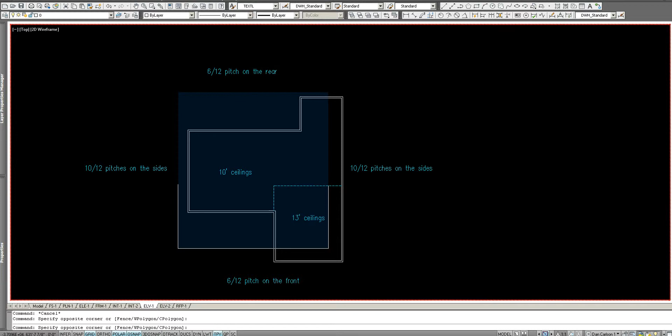Alright, so I am going to do a demonstration on how to draw a fairly simple roof, but with a couple of things that make it more complicated than just a standard roof. Let's say we've got a building shaped like these white lines, and the clients want 10-foot ceilings throughout, but a 13-foot ceiling in the front, with 10 and 12 pitches on the sides to make it look nicer from the street. But they want 6 and 12 pitches on the front and back, maybe to save some money on the roof. So we've got a couple complications: unbalanced hips and valleys, and different plate heights.

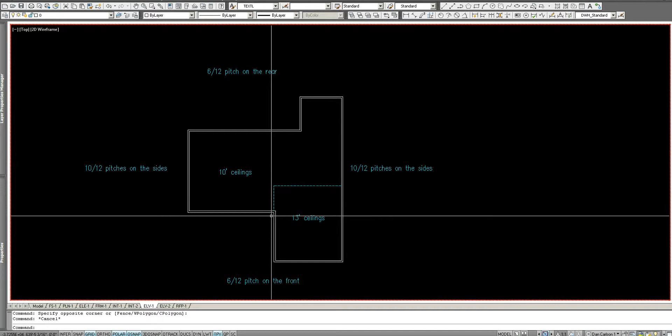So the first thing we have to do before we can start drawing any of the roof is determine how we want our overhangs to work. So what we have to do is, over on the side, draw a 10-foot plate with a 6 and 12 pitch, and then a 10-foot plate with a 10 and 12 pitch.

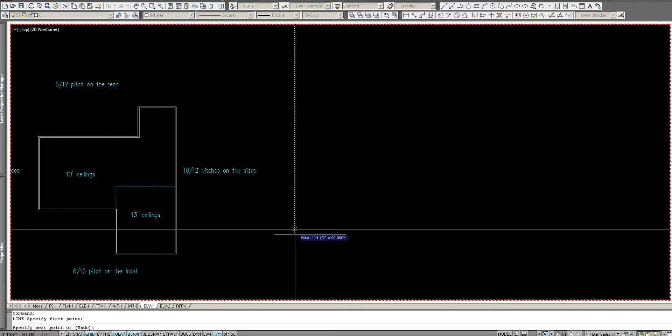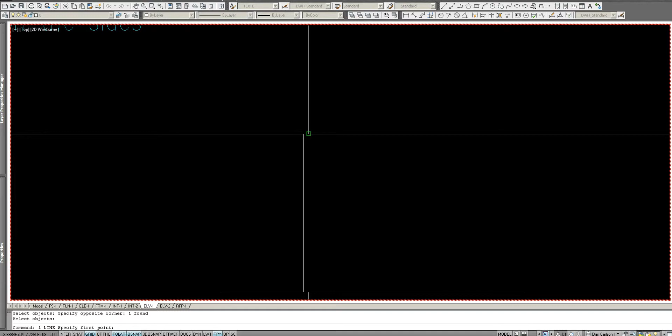The way you do this fairly quickly is come over here somewhere on the side and draw 121 inches, because they're actually 10-foot 1-inch plates, or 10-foot 1 and 1/8, but forget the 1/8. Over 4 inches and then back down. This represents the plate, the stud wall with the bottom plate and top plate. We'll go 12 inches, up 6, close it, and do an offset of 6 inches. That's the rafter and the 1/2-inch plywood. We'll worry about the overhang in just a minute.

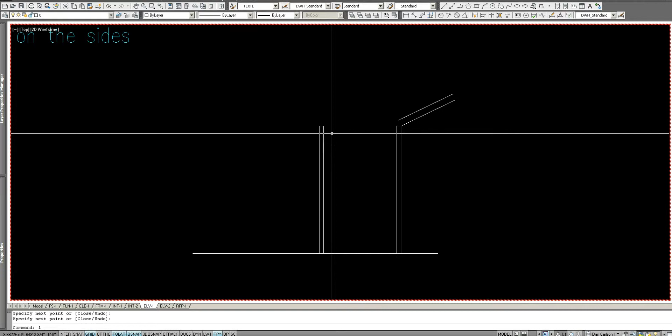That is the 6 and 12 pitch. Let's do the 10 and 12. 121 inches, 4 inches, back down. Again, we're going to do an offset just to make it easier to see in a minute. 12 inches, 10 inches, close. That's our pitch for the other side. Offset that by 6 inches.

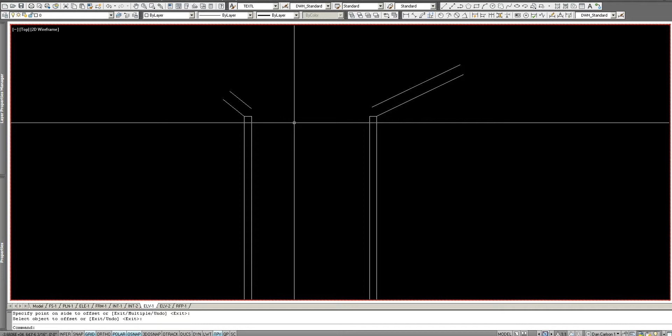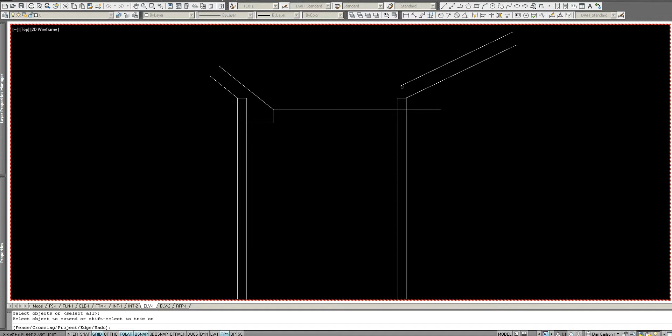Now we have to figure out our overhangs. What you'll notice is, because of the different slopes, the overhangs cannot be the same, or there'd be problems. So typically for the 10 and 12 pitch, we're going to want a smaller overhang. Let's start with 12 inches and see what that does. We'll go to this point. If you're doing a 6-inch fascia, just do 6 and then over. This is a very simplified version of an overhang, but for what we're doing, that's all that matters. We want the fascias to be at the same level. If we extend this over and draw the same 6-inch, we can see that this one was a 12-inch overhang, and this one ends up being a 20.5-inch overhang.

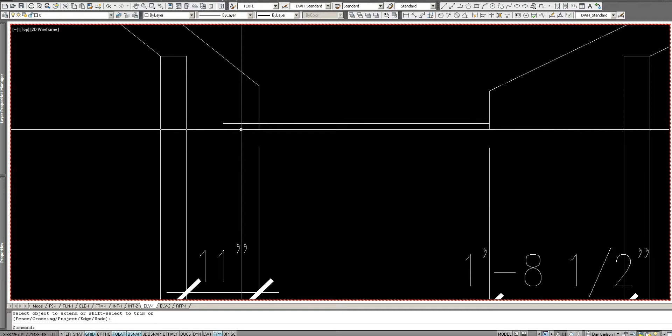That's okay, but you might say, what if we did an 11-inch overhang? How would that make the numbers any easier? Let's just see what an 11-inch overhang does. Same thing, we'll draw a line over. Before we even draw that box out, we can see that's a 19-inch. So maybe that's better, maybe 11 and 19.

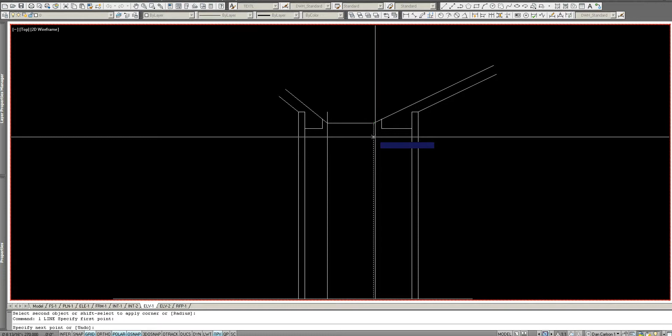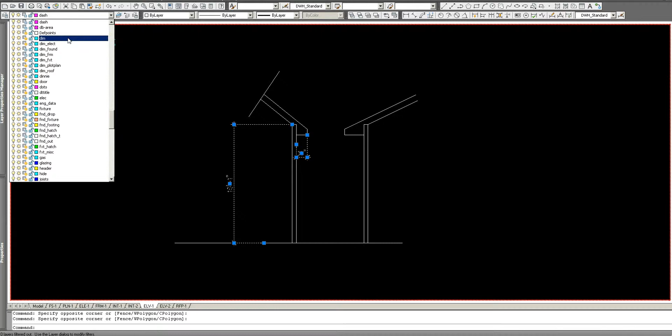So you could experiment with this. You could do all sorts of overhangs. You could have the 10-12 be a 14-inch overhang, which would mean the 6 and 12 would be a 2-foot overhang. So again, you have to know what these are ahead of time. Let's say we decided for this to be our solution. I'll sometimes make a little note like this so that I don't forget. Every house is different, and sometimes I just like to remind myself.

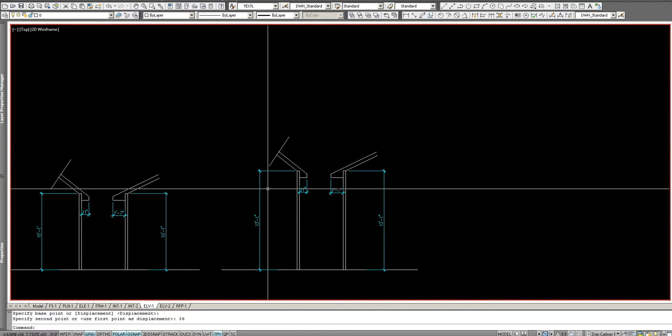So I've got over here on the side my 10-foot walls with the overhangs, and then I'm going to come right over here next to it and do my 13-foot walls, because I don't want to slope up to 13, I want an actual 13-foot plate. So I have these all drawn out, and we know what our overhangs are going to be. So now we know that where we have the 10 and 12, we're going to have an 11-inch overhang. We can come over here now, whatever layer you want it to be in.

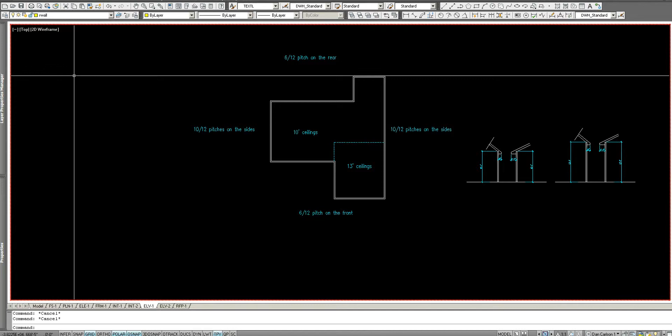Well, what I always do is I draw my roof plans with a different set of parameters. So I have an R wall for my rafter wall, or my roof wall, and I create a polyline that goes around the whole thing.

And then we can turn the wall layer off. Unless I turn off a whole bunch of other things. There we go, that's fine.

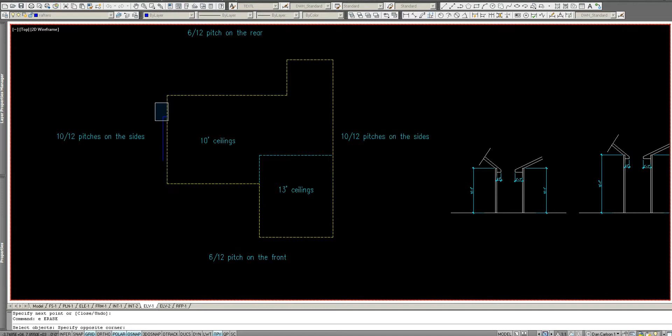Now for my rafters, I'm just going to come over here, and I know it's 11 inches. So there's my 11 inch on this side. I also know that even for my 13-foot ceilings, my 10 and 12 pitch side is going to be 11 inches. Again, this is 11 inches. Same on this side, and then we can copy this over, and that's 11 as well. Okay, so we have the sides done.

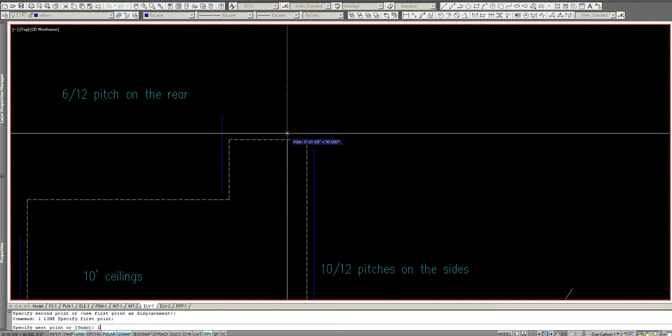For the front and back, which is the 6-12, we need to do 19 inches. 1 foot 7 is 19. And then we can copy this here. 19.

And copy this here. I'm going to first draw, and then we can go ahead and fillet all of the corners. Don't worry about where we have plates that go up and down and all that. For now, we're just going to do this to get it nice and clean.

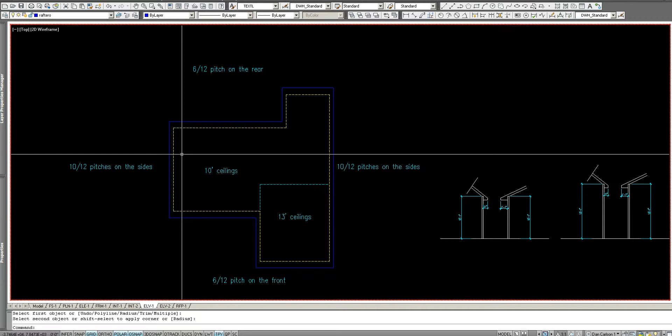We're going to draw this entire roof currently as a hip roof, because if you can draw a roof as a hip roof, it's really easy then to make any of them a gable. So we're going to do hips because those are the hardest.

So we need to create this hip and this hip and this valley and this hip and this hip, this valley, and so forth. So how do we create this? If the pitches were the same, you would just draw a 45-degree angle, and that would indicate that we have an even pitch on both sides.

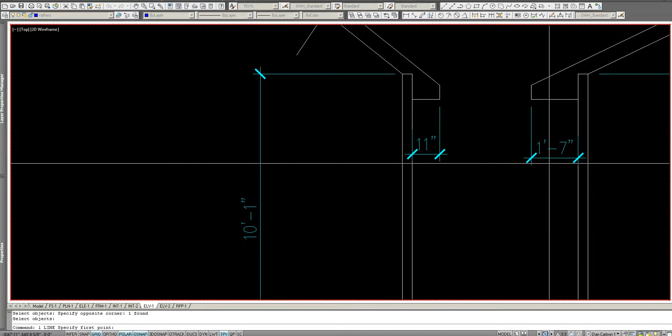Let's say it was an 8 and 12 and an 8 and 12, but we don't, so we have to create an angled line. The way we do that is we're going to draw one line that's 11 inches long and the other line that's 19 inches long. So which one do you make in each direction?

I always just remember that the lines go in the opposite direction of the roof slope. So we know that this roof here, I'll draw an arrow real quick. That is a 6. This over here is a 10.

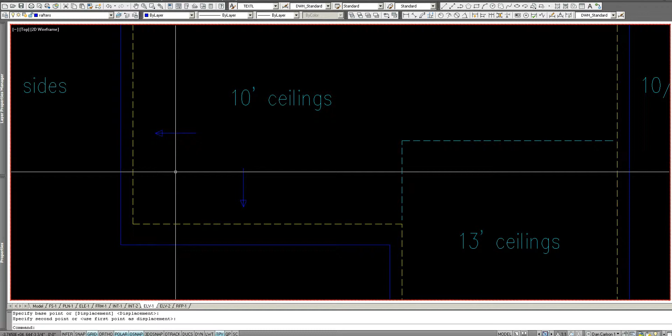So if I draw the opposite of that, instead of doing down a 6, I do a 10 here and a 6 here. And then do a close command. That creates the angle that is this hip.

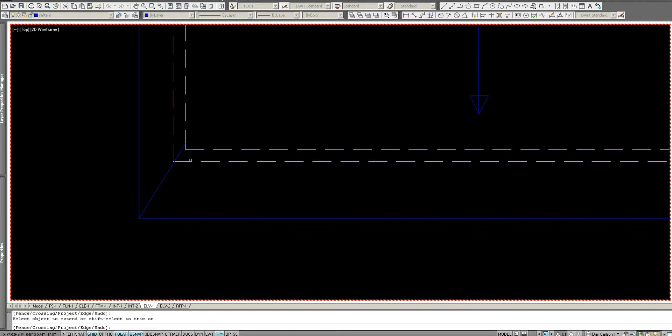When I put it there in the corner and extend it, it's going to come very, very close. You might say, well, why doesn't it hit exactly? Well, because you have to offset this to the inside—actually, that's not true, sorry. The reason it's not exact is because I don't think these are exact.

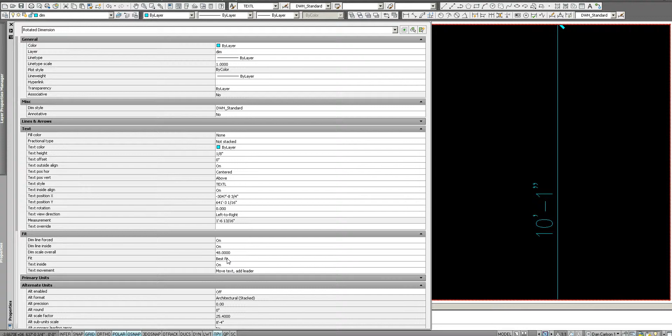If we were to take our dimensions and carry the tolerances out, where are my tolerances? Well, oh, there it is, fit. No, that's not it either. Primary units, there it is, sorry.

Instead of doing a round off at 1/2 inch, if we were to do something like 1/8 inch, and then the precision is at 1/16, you would see that we're actually at 18 3/4.

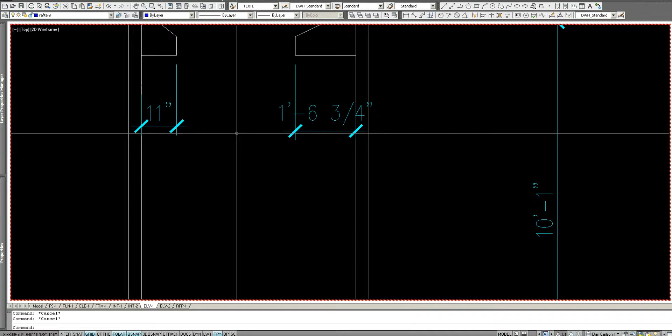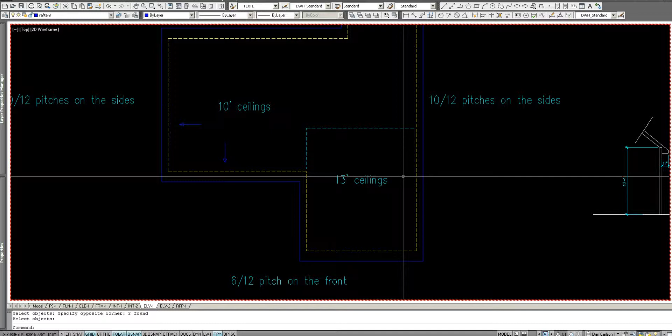So if I was actually to do this as an 11 and 18.75—did that wrong, sorry. If these overhangs were instead of being at 19 inches, it was at 18 3/4 inches. Now watch. 18.75. That's where our difference was.

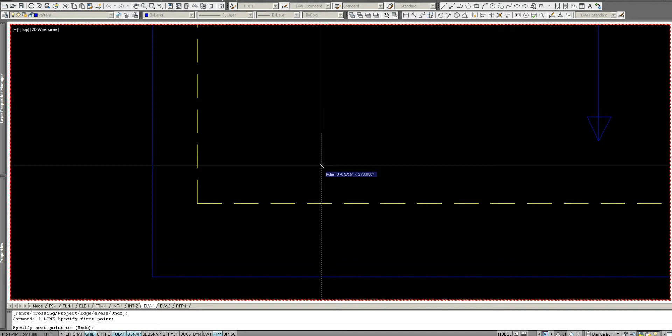Now if I draw my 10 down and 6 over and close it, this should be almost exact. And there you can see it's very, very close. So that's the reason why.

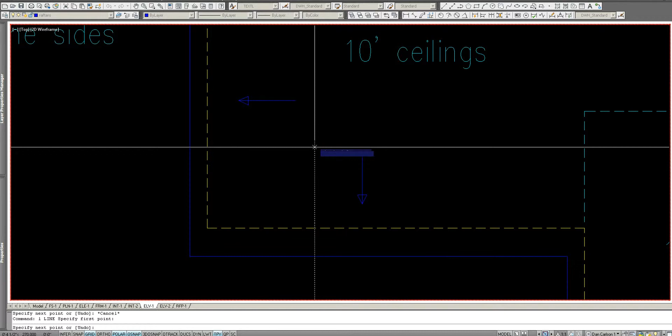I'm just going to undo all that, but it should be almost exactly to that point. So sometimes you can cheat if you know and just go to that point, but again, we'll just stick with 10 and 6 and close, and that creates that angle.

Extend it out a little bit. Erase and erase. We can do a mirror command because we know that the back is also that same 10-foot plate. And then at this point we're going to have a ridge.

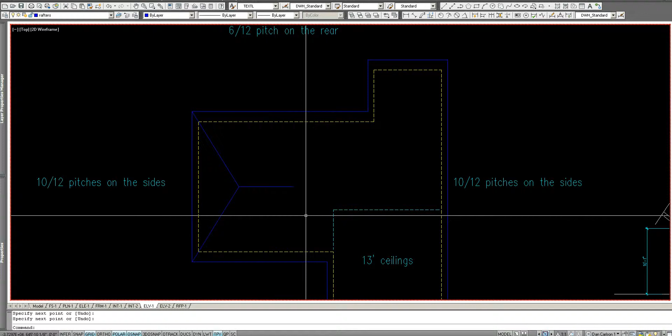We can do the same thing over here, and since we've already done the angle, we can steal it and just copy it over here and here, and then fillet. And since this is a 10 and this is a 10, they just join in the corner there, and then we have a ridge that connects these.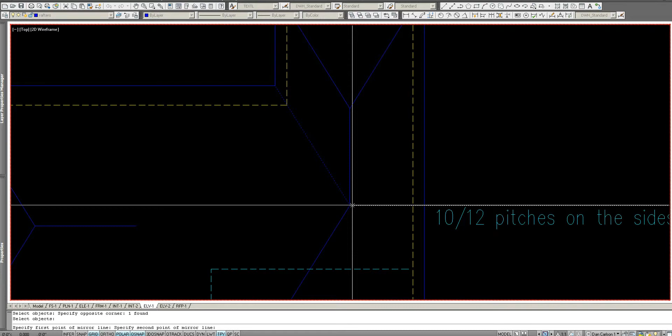And then this is going to shoot off into space somewhere, and this is where it gets a little bit tricky, because if we come to the front, we know that all three of these walls have to be 13-foot ceilings, right? So this is easy.

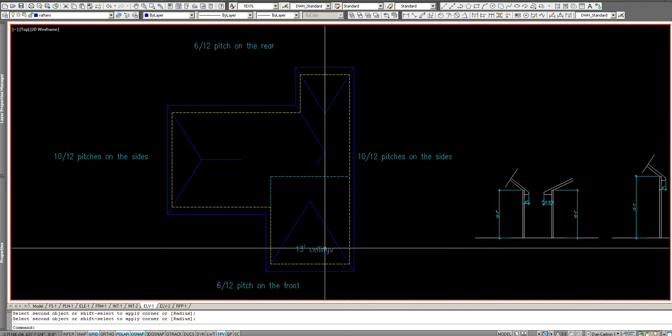This is just a regular hip, and over here's a regular hip, but at some point we go from being a 13-foot wall to a 10-foot wall, and it's right here where they have a room.

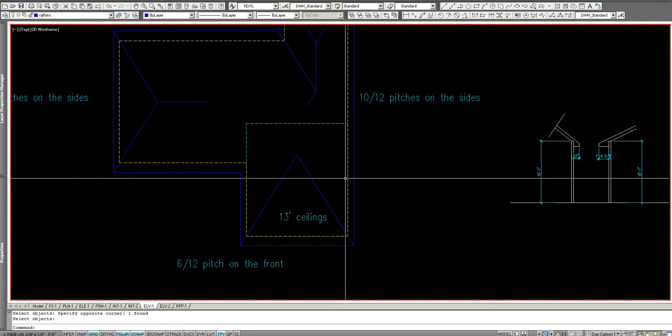So what we're going to do is actually have one roof that's sitting up on top of here, and the other roof comes down and hits below it. And the way we do that is, first of all, I just randomly—yeah, that's fine. We will end up with another soffit that comes off the back side. So whatever this distance was, which was 19 inches, we're going to come back here 19 inches.

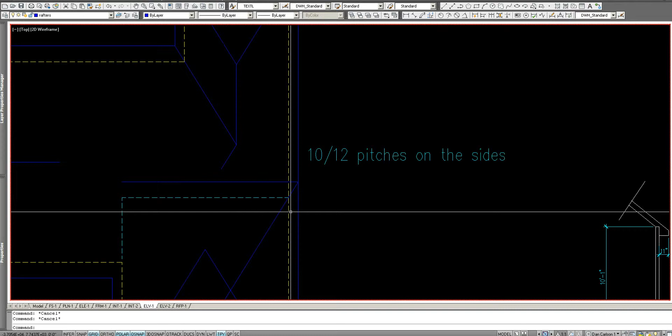And it comes off here. So again, we've got all of this at 13. I love that same color.

So this is a roof that's sloping up, and this is a fascia board that's going flat. So at some point they are going to meet. The question is where. Well, we've got all this mess going on here. Since these two intersect before anything else does, that's going to create a ridge right there.

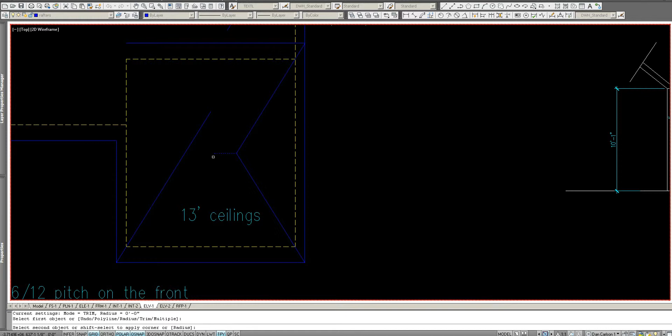So again, we've got a plate. This is a fascia board that's level, it's horizontal. This is also a fascia board that's horizontal, but this right here is a roof that's sloping up. So when does this roof here hit this fascia? There's going to be a point where it hits.

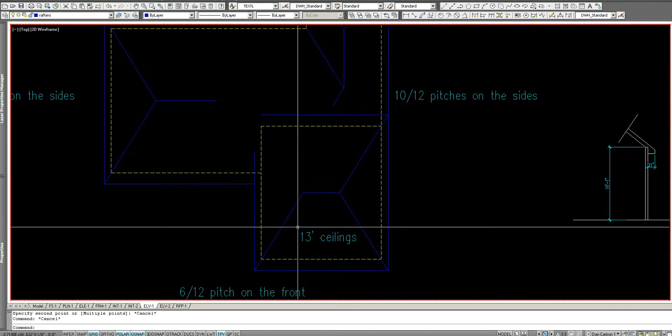And you know what, just for the sake of math, I'm going to change this to a 12-foot ceiling because I want it to be a little bit more obvious where these things hit. It's a 2-foot difference. So how do we know where this roof comes up and eventually hits this piece of fascia board?

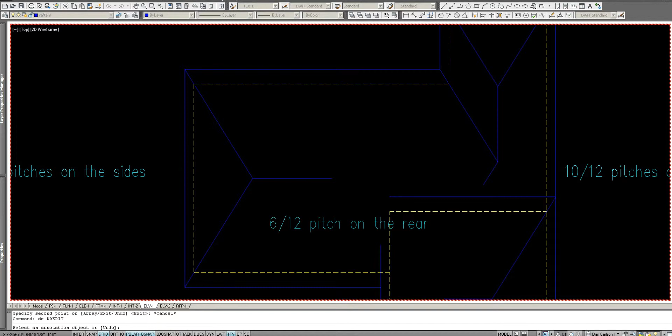Well, this is where math comes in. We know that this is a 6 and 12 pitch right here. So what that means is that for every foot we go back, it goes up 6 inches. Well, we know that we're actually going to go up 2 feet because we're going from a 10-foot ceiling to a 12-foot ceiling. So we know that our up is 24. That means our run is 48, and that's our 6 and 12 pitch.

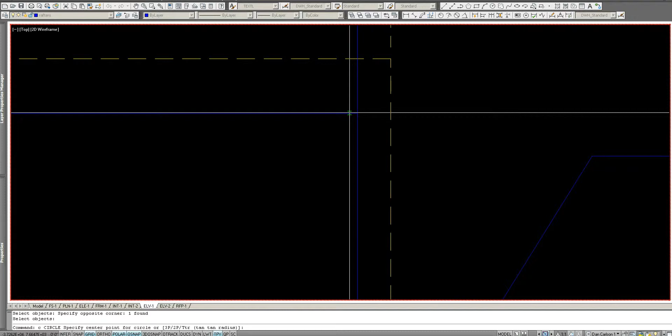So again, from this point here up to this point here is a 2-foot increase. That means a 4-foot change in front to back. So we take this fascia board and we go back 48 inches. And at that point where that hits it is going to be the point right here where this fascia board hits this roof. So again, it was a 2-foot difference in height, 10 to 12.

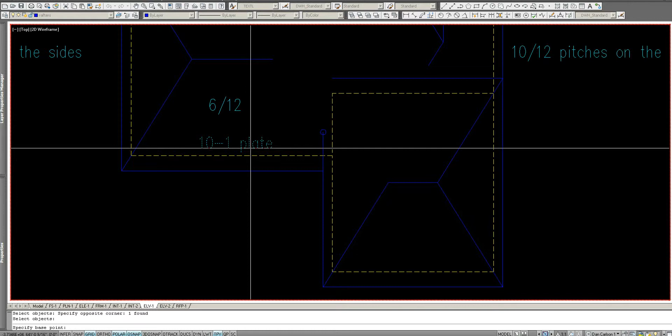In fact, what we would have normally here is a designation that would say like 10-1 plate, and another one here, just so that we don't get mixed up here, that would say 12-1 plate. Okay, so those are our 2 plates.

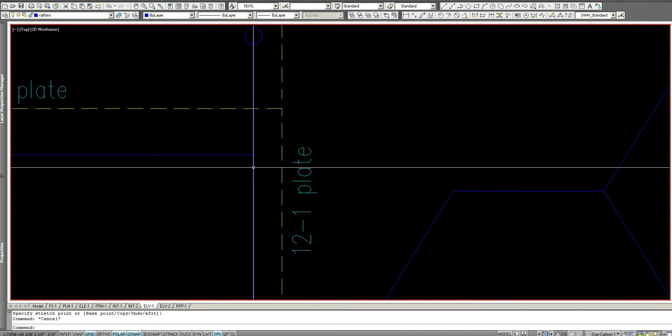So as long as these fascias are equal, which they are - see how they're the same? That's why we did it that way. As long as those two are the same, then from this fascia to this fascia is a rise of 24 inches. And on a 6 and 12 pitch, that's 48 inches.

So again, 48 inches back. What do we do at that point? We take this same hip and turn it into a valley right there.

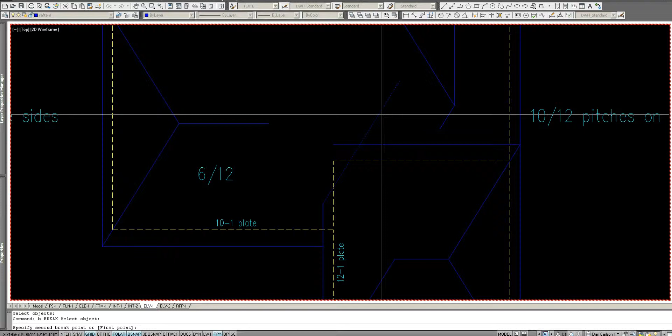Okay, what's going on here? We don't know yet. Let's just trim this off, not worry about it. This is a ridge up high. We need to have another hip coming down. So we've got all kinds of things happening in this area.

We also need to figure out where this roof here intersects with this fascia. Again, this fascia board is horizontal. It doesn't go up and down. It just goes straight on a horizontal plane. But this roof next to it is going up, up, up, up, up.

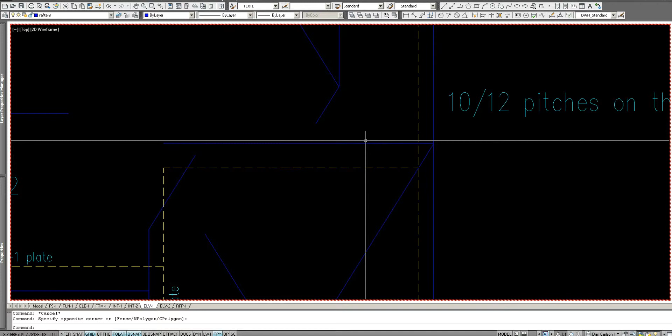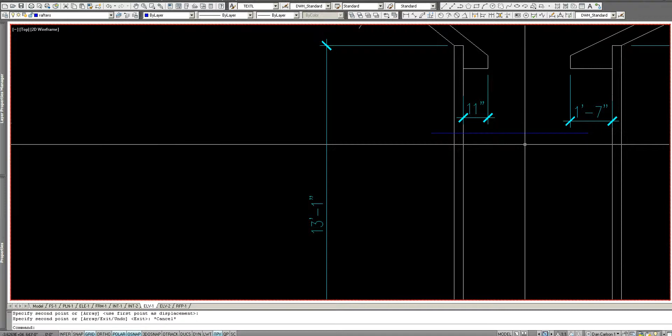Again, we have a 10-foot plate here, and we have a 12-foot plate here. So we know that there's going to be a 2-foot increase from this point to where it hits. Once it goes up 2 feet, it's going to hit this. I can kind of show you here what that looks like, because here's the fascia board below, and it's got to go up.

No, we need to make it a 12-foot plate. It's got to go up 2 feet. And once it goes up 2 feet, it hits this fascia board, the top edge.

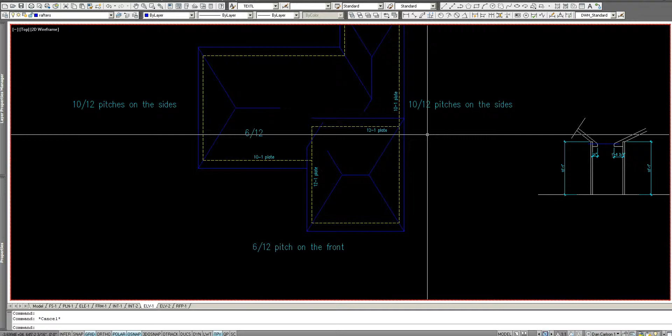Well, this is a 10 and 12 pitch roof. So the way we have to do that is take a calculator out. And the ratio of 6 and 12 is easy because it's a 2-to-1 ratio, but 10 to 12 is a little different. So what we do is we have to create a fraction. 10 divided by 12 is 0.833333.

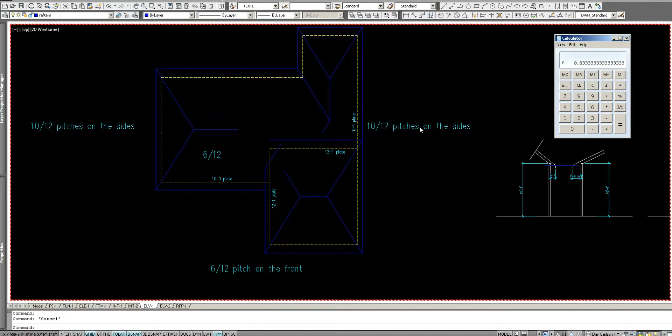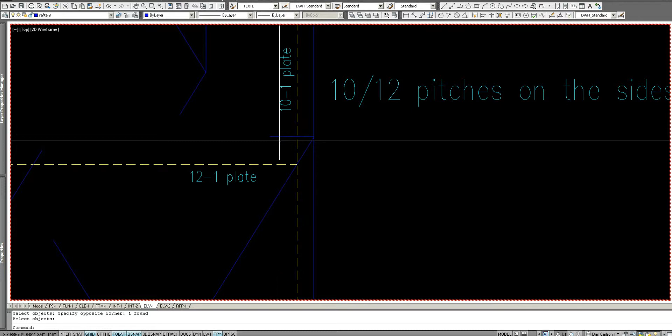Okay, you just got to remember that or save it as an integer or a component for learning the math. We know that we're going up 2 feet, but we're going to go over a certain distance. So what we do is we do 24 divided by that integer, 0.83333, and it becomes 28.8. So we're going to copy this over, 28.8. That point right there is the spot right here where this roof overtakes this soffit.

So again, to do that math, the formula is basically the rise divided by the slope equals the run.

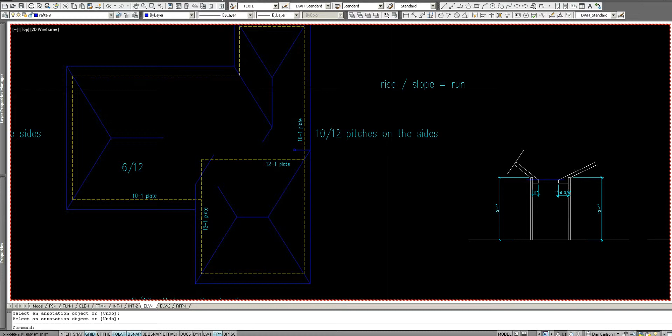As long as you can get that figured out, the rise divided by the slope works. So the rise is 2 feet, or 24 inches. 24 inches divided by 0.83333 equals 28.8. That's the math.

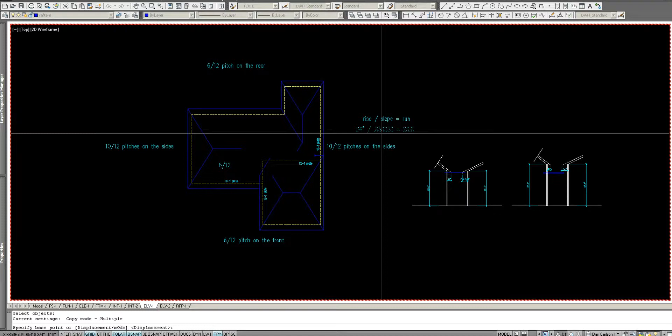When we did this one over here, just to prove that it works, 24 was the rise. The slope was 0.5 because 6 divided by 12 is 0.5, so that equals 48. If you punch that into your calculator, 24 divided by 0.5 equals 48 inches.

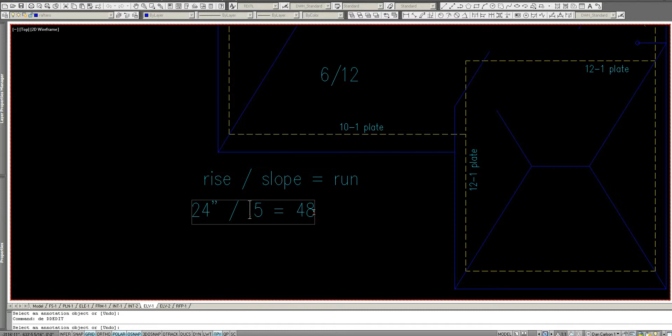So that's how the math works. Trust it. It never is wrong.

And again, if we had forgotten what we were doing here, we know that we've got a 10 and 12, and a 6 and 12, so this direction is the 10, so I'm going to draw 6 inches, and this direction is the 6, so I'm going to draw 10 inches. You do the opposite, and you can see it's the exact same.

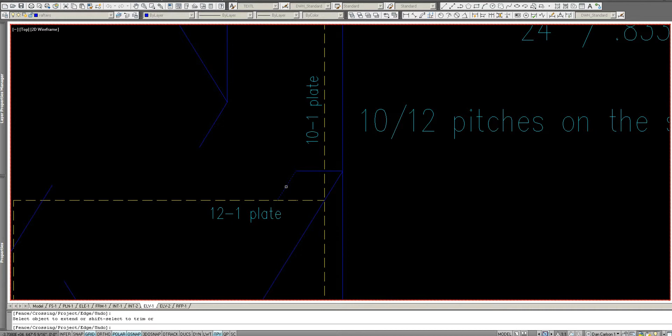So that happens to be the same slope as these, and that's why I said earlier you can just steal it. So now we've got all these hips and valleys heading off in different directions.

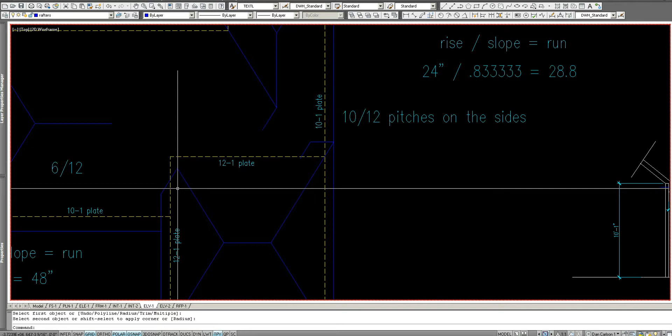This is where you have to start just extending them until you can figure out what's going to hit first - these two or these two? You can see that these hit earlier, before those two do. So that's the spot that's going to hit.

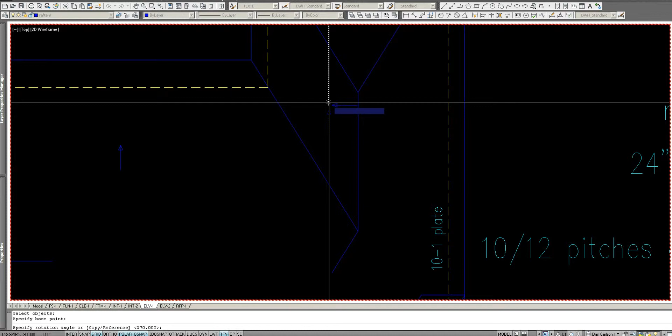I also will go ahead and draw little arrows because they help me figure out the slopes. Sometimes you can get a little bogged down in which way this roof is going, so we know that's going that way, we know this is going this way. These are just temporary things I put here while designing the roof. We know this roof is also going here, but this one here is going this way, and this roof again is going this way.

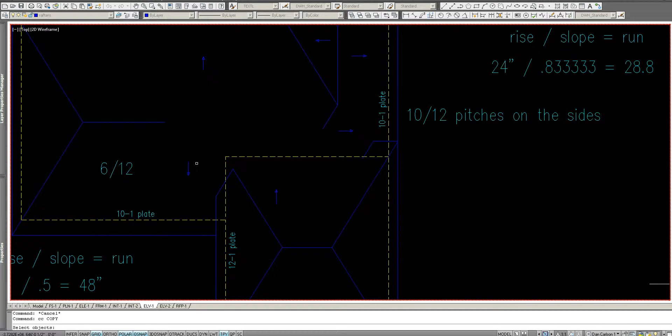So let me erase that for the moment. Where is this one headed? Well, we also know that there's a roof here as this comes over that's aiming down.

So what we're going to end up with between this roof and this roof is a dead valley. That means it's where water would just sit. And if I draw this line this way, you can see there it is. A straight line on a roof either means a dead valley or a ridge. Obviously ridges are good, dead valleys are not.

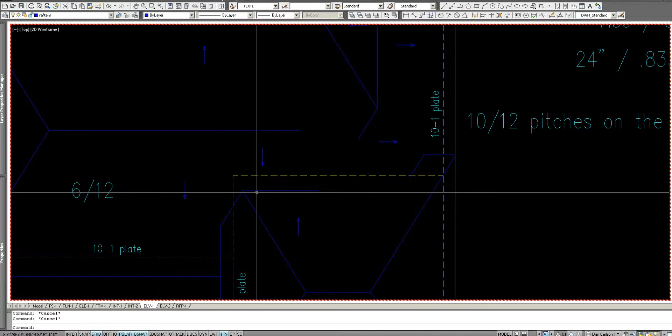So at some point where this roof comes down and this roof comes down, there's going to be a dead valley. I think that this one is going to come here. You can just start to experiment and play around with things, and you'll see eventually that if you play around with enough options, they will all connect exactly.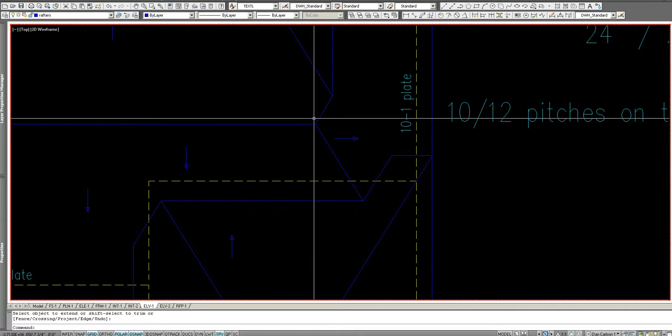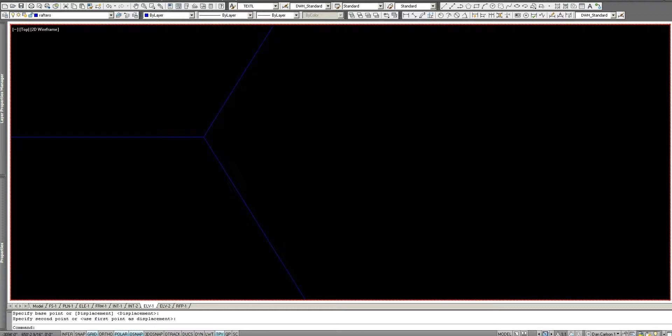And somehow we got off by 1/8 of an inch, and I'm not sure exactly how. So somewhere one of my connections is not quite right. It might - oh, you know why? It's because I shortened the number. The 28.8 should have been something more like 28.815 or something. So if you really want to get exact, just push this here. This goes here, that goes there, and there.

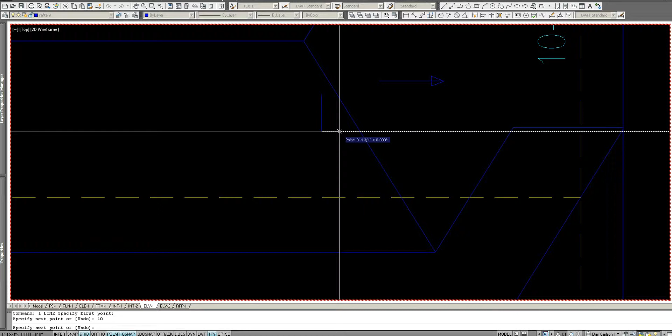That's exactly right. So now you can look at all the arrows, and you can see that if there's an arrow going left and down, you can check that angle by saying that the down should be 10 - it's the opposite of what it is - and the right should be 6, which is the opposite of what it is. And look at that, the angle is the exact same. That's how you check to make sure everything's right.

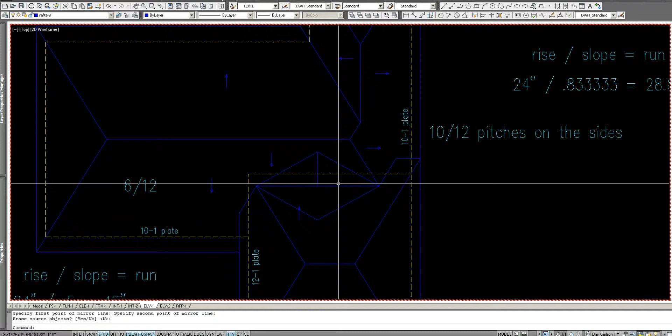So what we have on this particular roof is a gigantic dead valley. Not good, but I wasn't really thinking about that when I created this example, or this teaching exercise. So what we would end up doing in this case is putting in a big what we call a cricket, which is basically another roof inside of here that you really can't see from the street, you can't see from anywhere, and it looks like that.

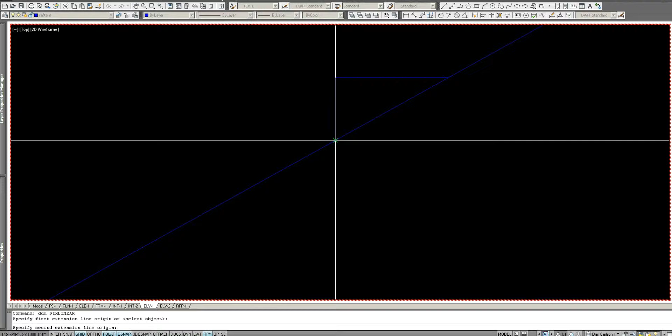And you might say, well, what are the slopes going to be of that? Well, there's a way to find that out too. We know that if this is a 6 and 12 pitch, and I draw a 6 this way, that whatever I draw here is the other slope. So this right here is 3.5 - this is a 3.5 inch 12 pitch. So there's always a way to figure these things out mathematically.

For now, we'll just leave it at that. And that is what the roof would look like with 12-foot plates, 10-foot plates, 10-12 pitches, and 6-12 pitches.